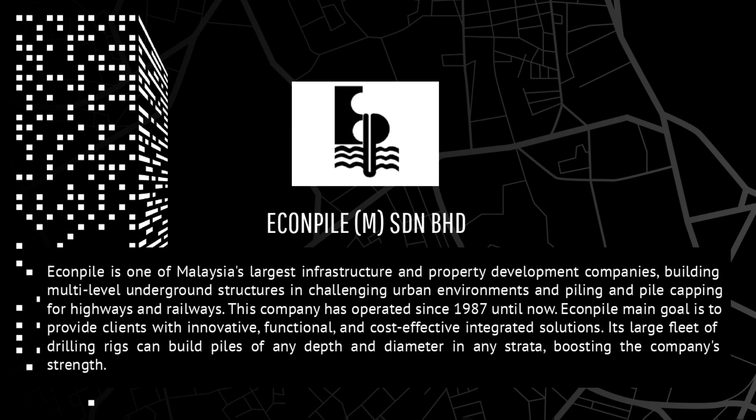Econpile is one of Malaysia's largest infrastructure and property development companies, building multi-level underground structures in challenging urban environments, and piling and pile capping for highways and railways. This company has operated since 1987 until now. Econpile's main goal is to provide clients with innovative, functional and cost-effective integrated solutions. Its large fleet of drilling rigs can build piles of any depth and diameter in any strata, boosting the company's strength.

Next is related to the existing project at the Kiaramas deDaun construction site. So, as we can see, we propose development of 3 condominium blocks containing Block A, 40 floors and 223 units, Phase 1; Block B, 40 floors, 213 units, Phase 1; Block C, 40 floors, 223 units, Phase 2; and Block D, 1 floor residential, 2 units, Phase 2, with 6 floors of ground level parking and recreation facilities on lots

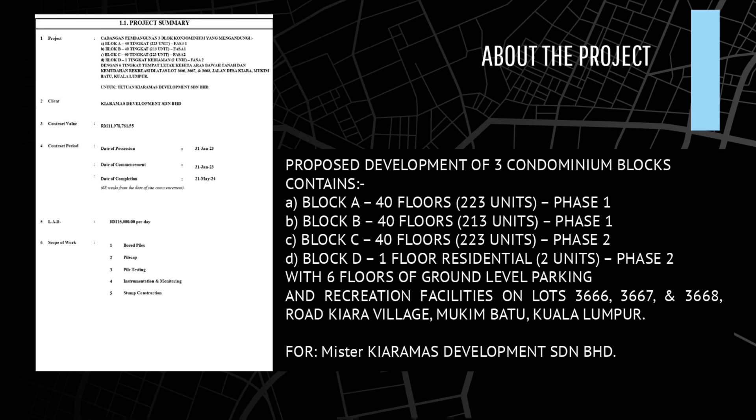3666, 3667 and 3668 Road, Kiara Village, Mukim Batu, Kuala Lumpur, for Kiaramas Development Sdn Berhad. Okay, for the next slide is site organization charts.

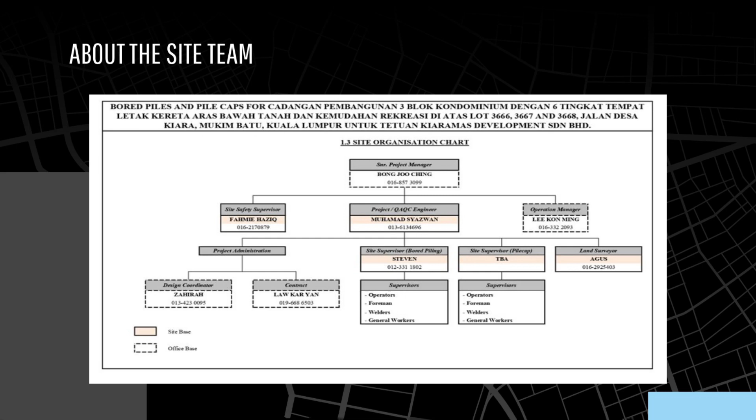For this company, the senior project manager is Bong Joo Ching, and helping with site safety supervisor is Fahmie Haziq. Project engineer or QA/QC engineer is Muhamad Syazwan. Operation manager is Lee Kon Ming, and under them there is site supervisor Steven and land surveyor Agus, and there is contract manager Law Kar Yan and design coordinator which is Zahirah.

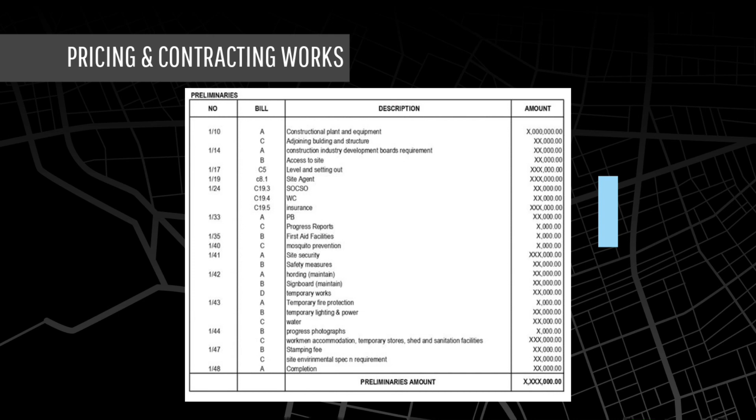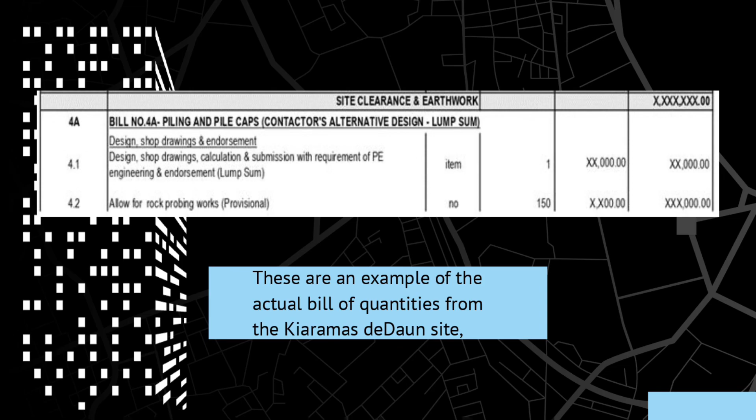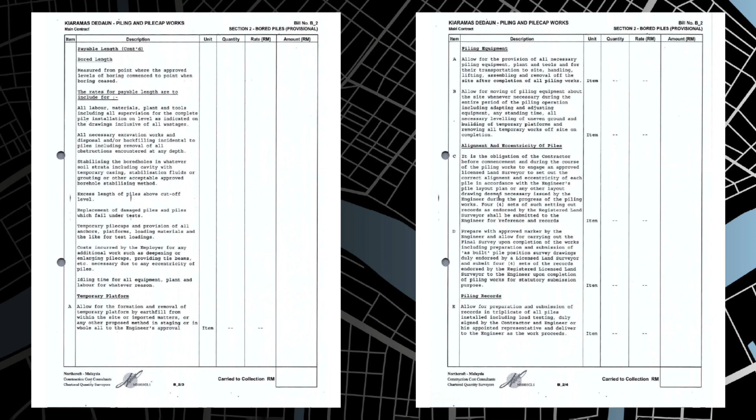Pricing and contracting works. In order to participate in the tendering process, contractors who are interested in carrying out the bore pile construction project are required to submit competitive bids. This document provides an overview of the requirements, specification and any other pertinent details regarding the project. A document that is included with the tender is called the Bill of Quantities. The document contains a list of all different types of work that are going to be done for the construction project, along with the quantities and specification of each item. It provides contractors with a foundation upon which they can construct their cost estimates and bids.

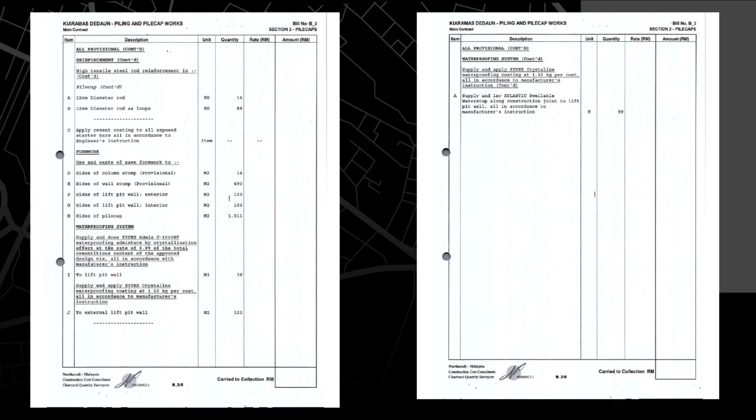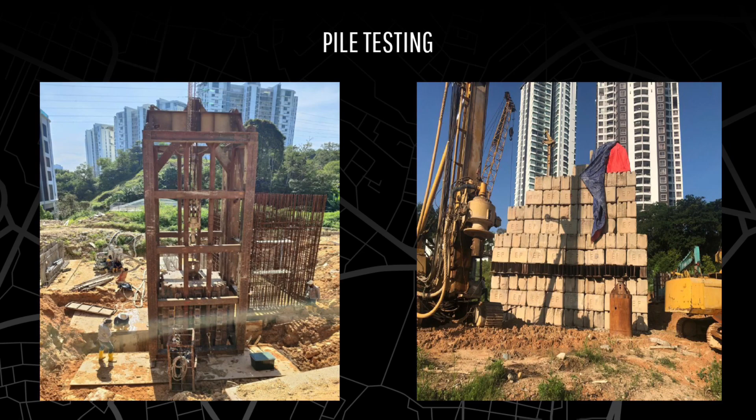Before submitting a tender, contractors are required to formulate an estimate of the costs associated with the construction of bore piles. In order to accomplish this, it is necessary to evaluate a number of factors, including the depth and the diameter of piles, the condition of the soil, the requirement for equipment, the cost, labor and materials, and the overhead expenses. All these are examples of BQ for Kiaramas deDaun.

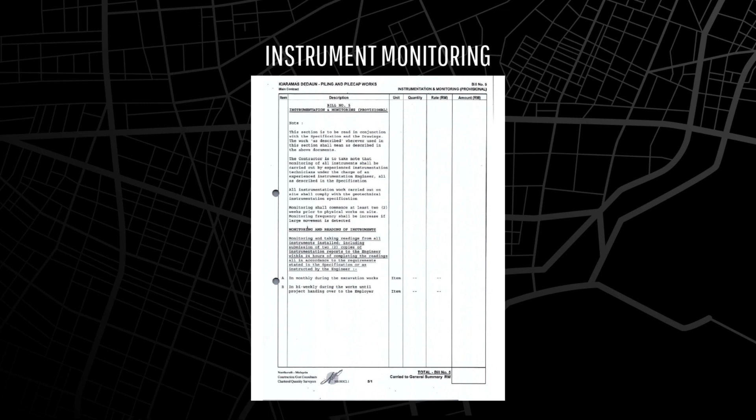Effective pricing and tendering processes are crucial for a successful bore pile construction project, as they ensure that the selected contractor can deliver the required work within budget and schedule constraints. So this is the example of the tendering bill of quantities.

When it comes to bore pile construction, planning resources entails the methodical identification, allocation and management of a variety of resources that are required for the successful execution of the project. The construction of bore piles can require a variety of resources, including manpower, machinery and materials.

For the materials, if the construction method for the bore pile includes casing materials, then you should assign them. To ensure the drilling operations are carried out in an effective manner, it is essential to ensure that drilling fluids are ready and available. For the manpower,

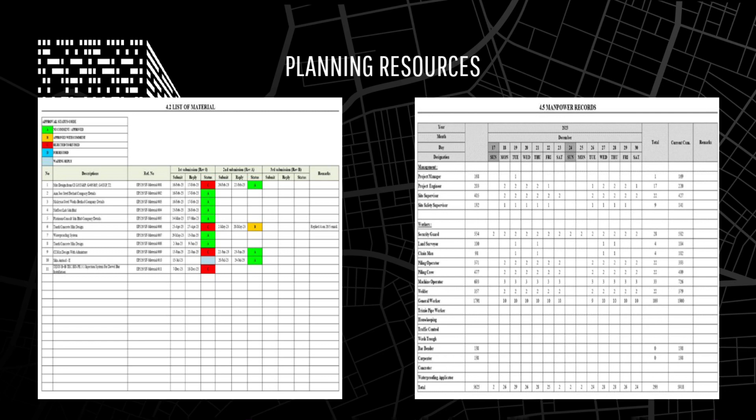Identification and assignment of skilled labourers, including drillers, geotechnical engineers, supervisors, and safety officers, are among the tasks that need to be completed. A schedule that maximizes the utilization of labour resources throughout the various phases of the project should be developed as part of the labour scheduling process.

Next, for the machinery, is selecting and allocating appropriate drilling rigs based on the requirement of the project, taking into consideration factors such as depth, diameter, and soil condition. This is an important step in the drilling process.

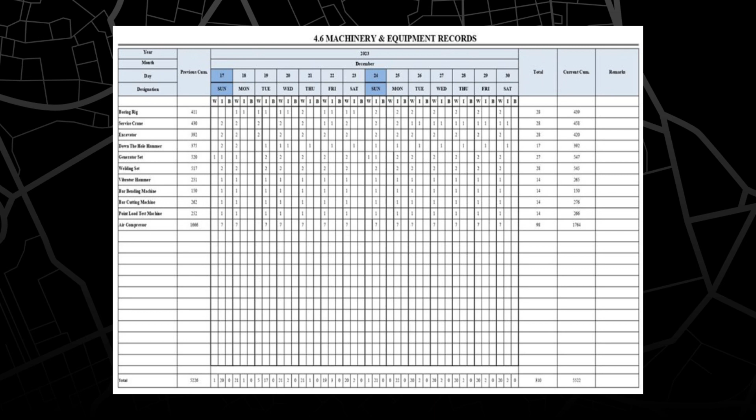In order to ensure that drilling and construction activities are carried out successfully, it is necessary to identify and assign support equipment such as a crane, concrete trucks, and other machinery. Establish a maintenance schedule to guarantee that the equipment will continue to be in the best possible working condition throughout the duration of the project.

Next is detailed drawing, where we can see a few site and top views for the site. Here is the entrance, which we can see as the green access, and a few others, and we can see the legend here. For the site view, we come closer into the photo so we can see deeper.

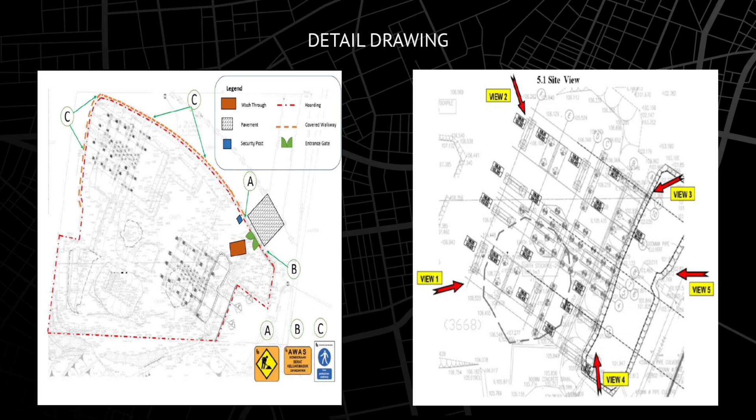The next slide is project scheduling. This is the progress of work which has already started. Here we can see the cut off date, summary progress tower B, summary progress tower C, and summary work done. So basically this is the progress of the site.

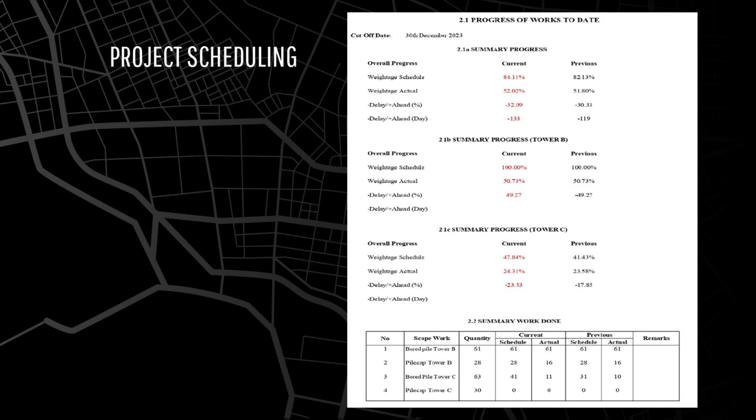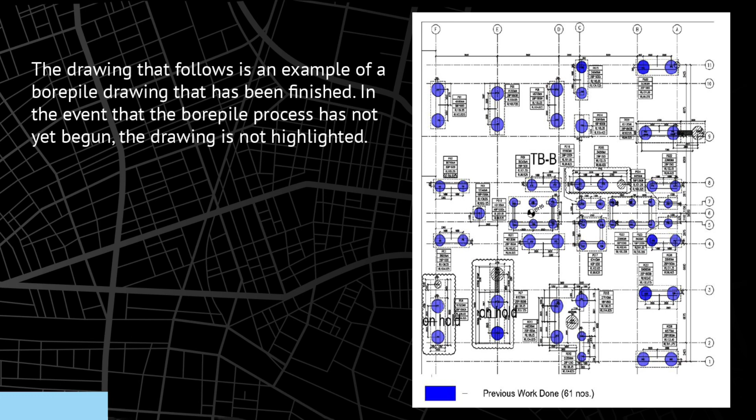Next, we can see the drawing that follows is an example of a bore pile drawing that has been finished. In the event that the bore pile process has not yet begun, the drawing is not highlighted at all. So we can see the blue circle, which is previous work done, 61 numbers of bore pile concreted and casted. If the project has not started yet, the drawing will just be in white and black colors.

For the handing over, in the process of bore pile construction, the handing over procedure signifies the completion of the construction work and transfer of the finished project from the contractor to the client or owner. This process consists of a number of steps that are designed to guarantee that the bore pile construction project has been successfully completed in its entirety and the client has taken possession of a structure that is fully functional and in compliance with regulations.

We move to the next slide, which is an example of a graphic drawing of a bore pile and also a pile cap that has been designed. As we can see here, with the measurement and the usage of rebar, it shows how the structure will come together.

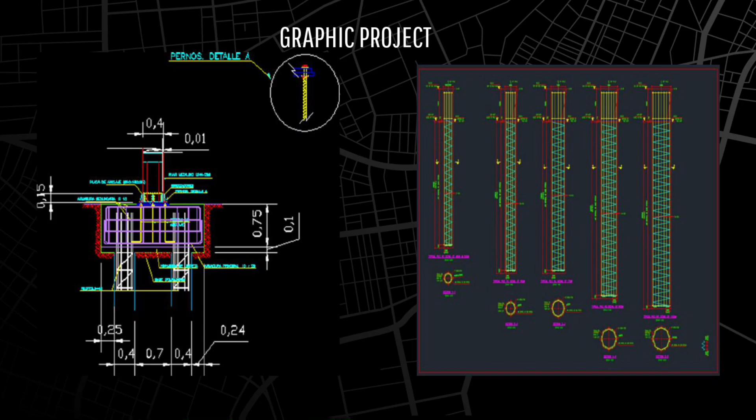For the risk analysis, construction sites pose many risks that can compromise project safety, integrity, and completion. Underground conditions like unexpected soil complexities or unstable terrain can make excavation and foundation maintenance difficult. Earthquakes, floods, and storms can damage structures and delay construction. Heavy machine accidents, collisions, and equipment failures can damage structures, equipment, and personnel immediately and permanently.

Careless construction can cause defects and damage to the built environment, utility interference, and service disruption, as well as extreme weather and temperature changes posing risk. Human errors, oversight, and safety violations can cause damage and accidents. Vandalism, theft, and unauthorized access also pose a risk to the construction site's security. Contractual disputes, liability issues, and low-quality materials complicate construction site risk management.

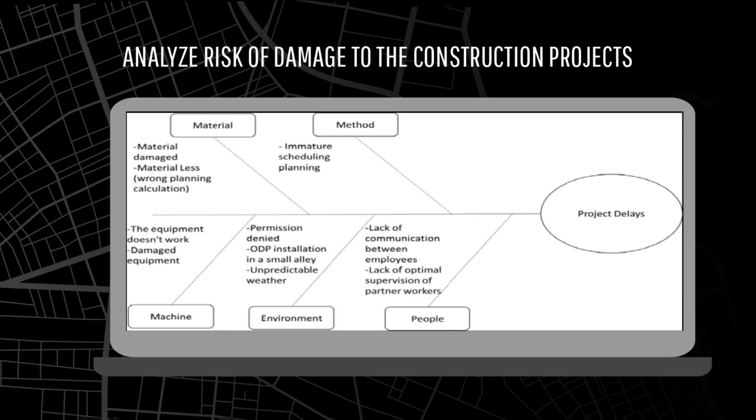Risk management must include thorough assessments, preventive measures, and effective communication to minimize this risk and ensure a successful construction project. Okay, for the conclusion...

Understanding bore pile construction tendering and pricing is essential to managing construction projects from start to finish. Contractors and project managers must understand the tender process, cost estimation and tendering. Sound pricing strategy boosts a contractor's competitiveness in project acquisition and project financial viability and success.

Bore pile construction requires careful planning, resource allocation and risk management. Contract negotiation, safety and environment compliance and timely construction completion determine a project's success. Tendering, pricing and project management in bore pile construction ensure high quality structures, lasting partnerships and a solid reputation in the construction industry.

When construction projects are finished, tendering and pricing skills become invaluable, enabling future endeavors and sustainable growth in the construction sector. That's all from me.